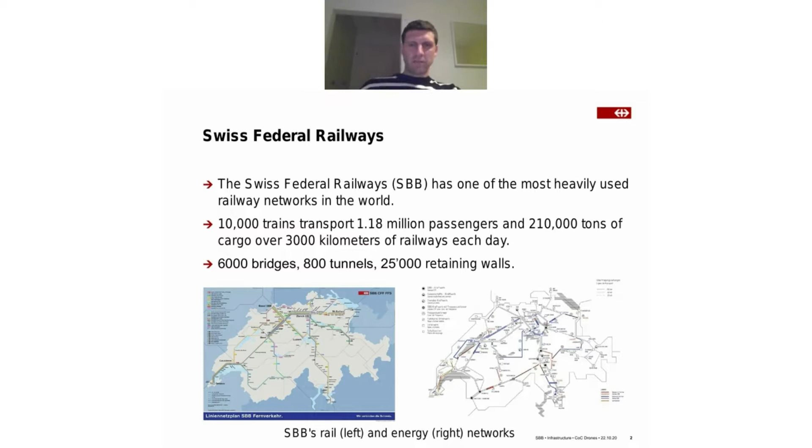We are 4 people working at the Center of Competence Drones, with 1 data scientist and 2 project managers, engineers. Our main task is to help our different departments and colleagues develop their use cases with drones and to define some standards, not only for regulations, but also for processing, analyzing, and so on. We are also connecting to different companies like Picterra that we saw before, and we have good contacts in Switzerland, but also all over the world.

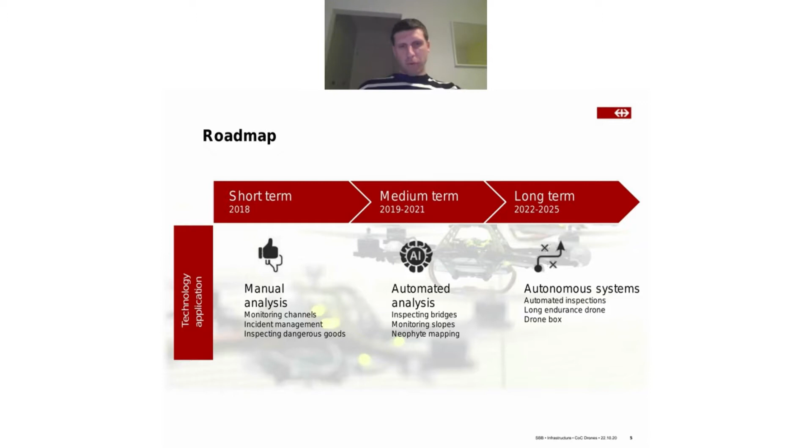So we started 2-3 years ago with some visual inspections using drones, but then we moved to automated analysis using AI, inspecting bridges or detecting plants. And the plan is that in the long term we move to autonomous systems, with autonomous drones, so that we can press the button, the drones capture data, and we can move forward with further analysis and analytics.

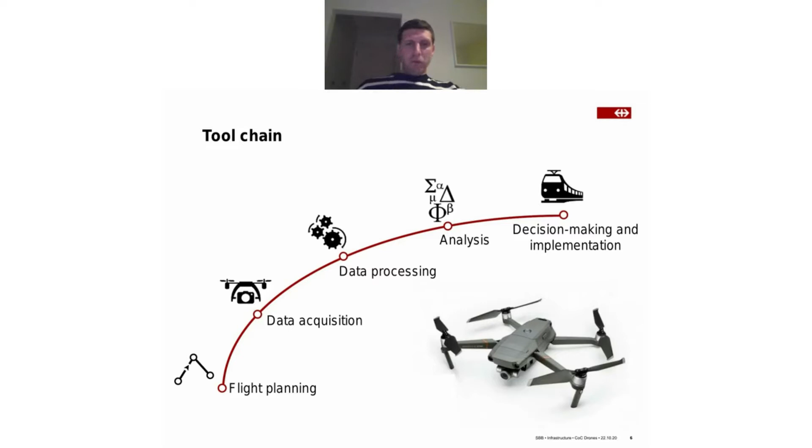And we have a long list of applications. I will not go through all this list, but it's just to show that we have some ideas that we bring to a proof of concept. And once we did the proof of concept and it's validated, we call it rollout ready, meaning that we can roll out these tests to the entire network of SBB.

When I made this list, I wanted to highlight which of these topics are using AI, but then I realized that almost all of them were using AI. So yes, we use AI on a lot of different topics, and I'll show some of them in this presentation. As for the technology, I spoke about drones, but we don't only use drones, we also use satellite imagery, and we combine them with terrestrial systems, so cameras and also LiDAR and so on.

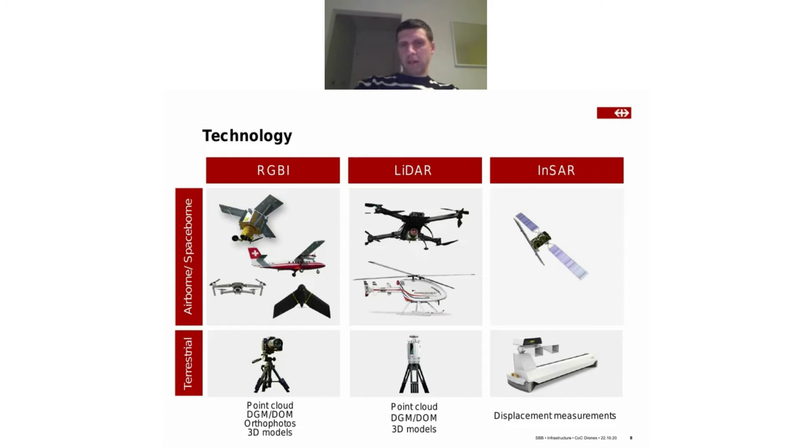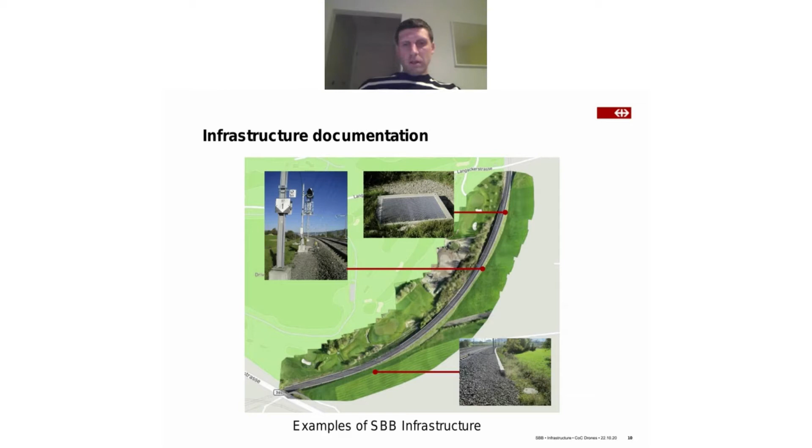So let's move now to the second part, showing some of these application examples based on AI. The first one I would like to show you is infrastructure documentation. All our infrastructure is measured regularly and documented in a database. We have different objects: signals, canals, manholes, and so on. I would like to show the first example precisely on the manholes. We wanted to automatically detect these manholes and update them in our database.

For this, we used orthophotos captured from drones, but also from helicopters, so that we get more data on the longer track. And we used the Picterra detection training that you saw before. We started doing some annotations on the platform and creating training areas. We already got very good results, with a precision of 96% and a recall of 80%. But we had quite a lot of false negatives that we wanted to remove from these detections.

So first, we added some training time. This parameter was introduced before by Roger. Basically, it's adding some layers in the neural network, and then we also added some annotations. We did active learning, meaning we used the detector that we had and reused its detections as annotations, so that we could go a bit faster. Adding these annotations improved the recall quite well, so that we could remove most of these false negatives. And at the end, to have some reliability on the results, we added some accuracy areas to get more consistent values on the precision and recall.

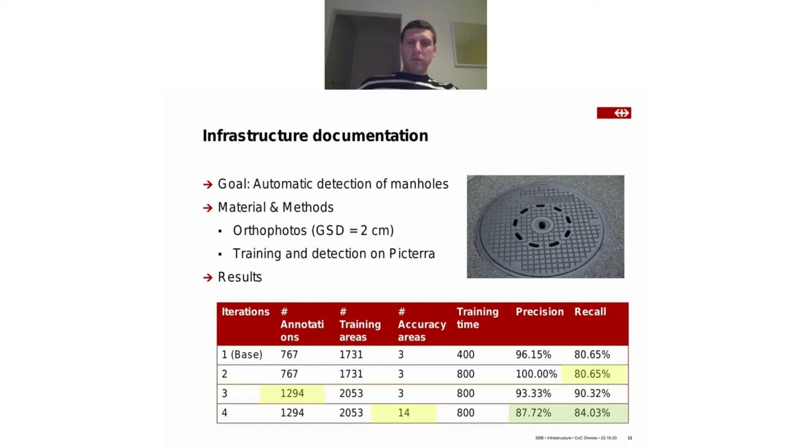And actually we did a comparison at the end with our own database, and we found out that more than half of the manholes were actually not correctly detected. And what we found out is that most of these manholes were covered by roofs or covered by vegetation. So basically, it was not really related to the detector, but to the data itself.

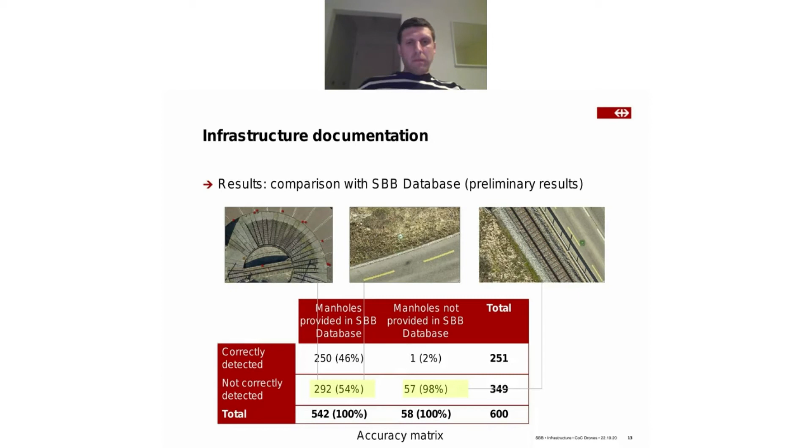And also, we actually had detections that were made outside of our parcel. So we detected some manholes that were actually not in the database. So this is why we also have some not correctly detected, but which actually were correctly detected. Then the next topic that I would like to show you here is the vegetation mapping.

So the idea is that we want to create some maps using drones and acquisitions from airborne systems. And we want to use these maps for treating, in an analogy to agriculture. We would like to treat this vegetation using hot water spraying vehicles. So we want to make a variable rate application, and we want to use as a basis these maps that we want to derive with machine learning.

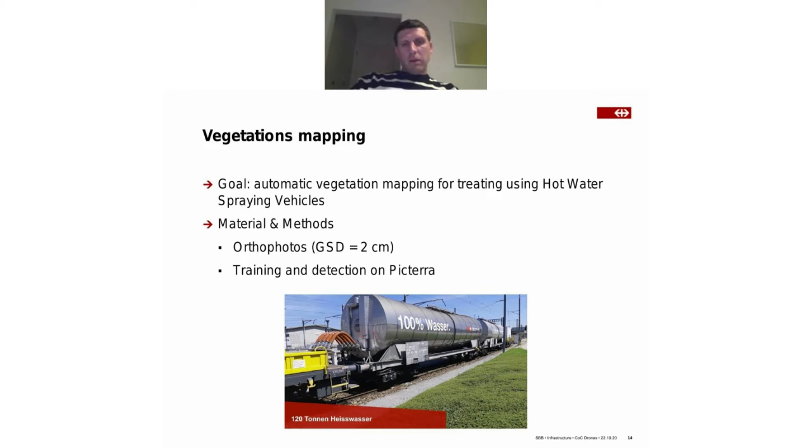So the data that we used here was again some orthophotos, and we used Picterra for the training and the detection. We created about 1,000 annotations and also 1,000 training areas. And we did some visual comparisons and observations that the first results were quite promising for us, so that we could use these data sets to spray where we effectively have vegetation.

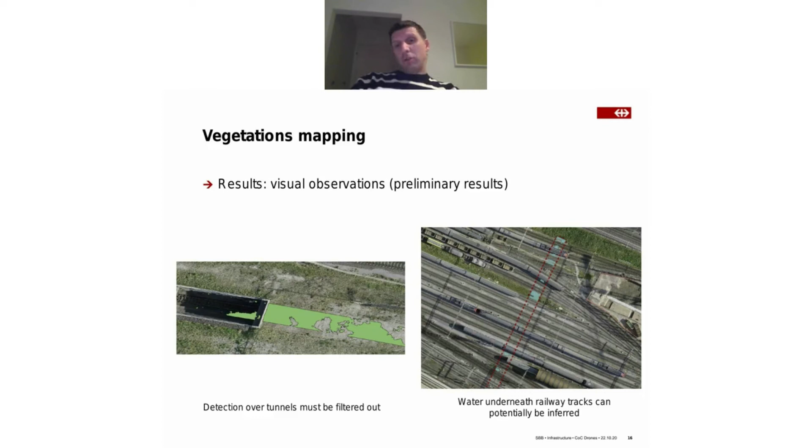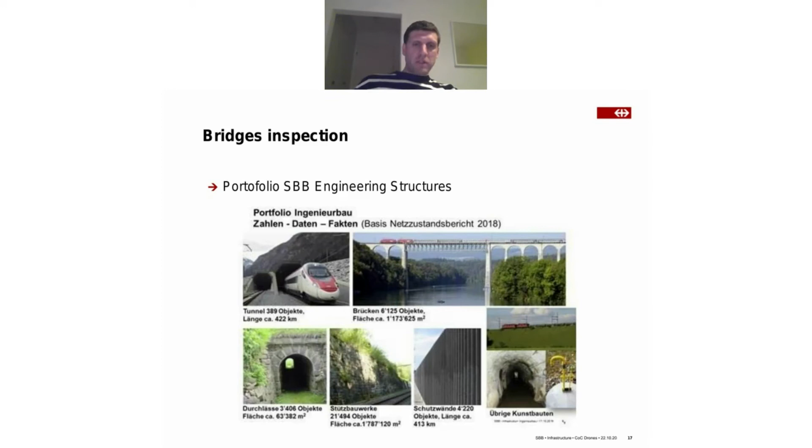The last topic that I would like to show you is about bridge inspections. We are talking here about bridges, but we have further engineering structures, so we have tunnels and bridges, and what I would like to show you here for the bridge inspection is the automatic damage detection on concrete bridges.

So we worked together with two different companies, CSEM in Switzerland and EasyInspect, a Danish company. CSEM used basically a Faster R-CNN model, which they trained and used for the detection of the damages. And in this case, we used an ortho-facade. So we generated an ortho-facade of the bridge, and that we used as an input. And EasyInspect used single images.

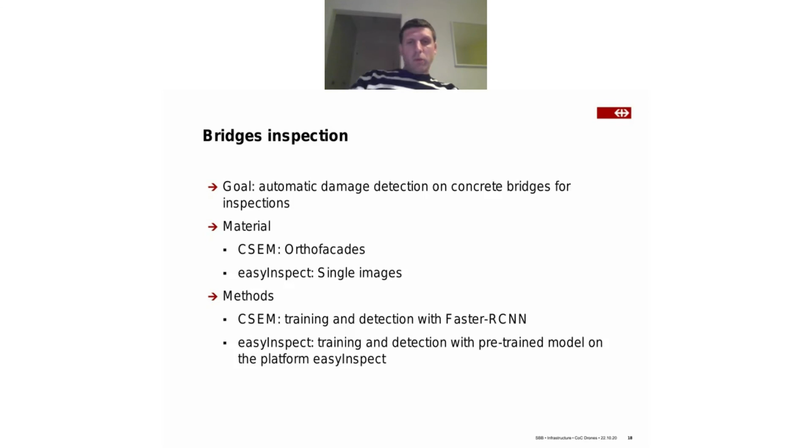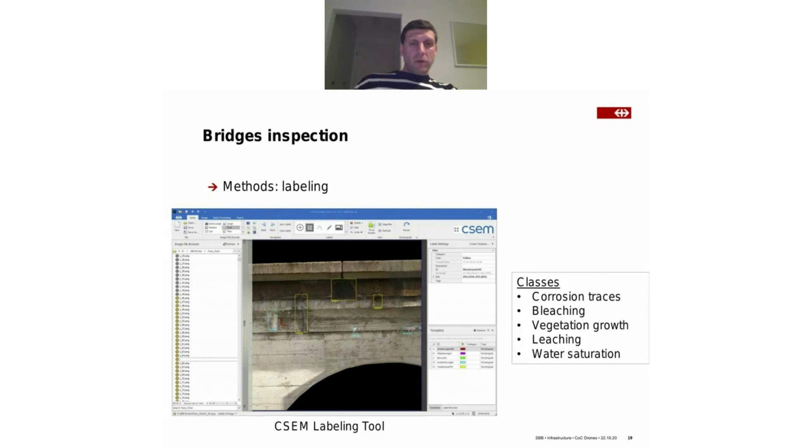So I'll show you here a bit of the results. First of all, about the labeling: we used the CSEM labeling toolbox, and we created different classes: corrosion traces, bleaching, vegetation growth, and leaching and water saturation. And the detection worked actually pretty well, so we were quite happy with it. We still had a lot of false positives, but as a first result, it showed that using AI for detecting damages on such infrastructures is promising.

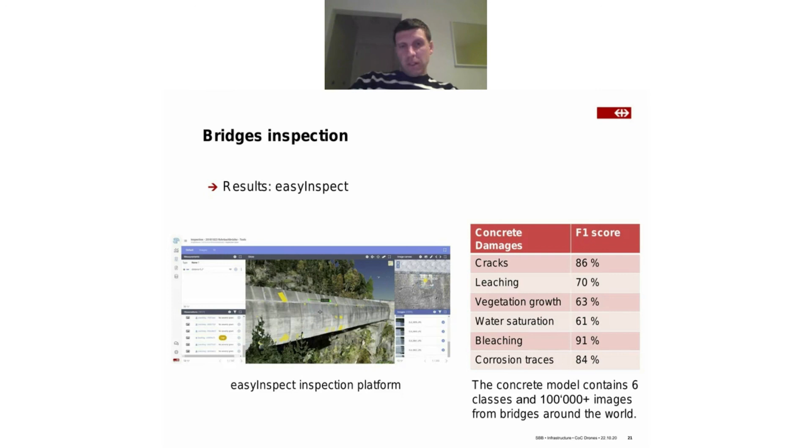For EasyInspect, we mainly used the platform for visualization and for consolidating the data set with the 3D model and the detected images. We used the AI from EasyInspect directly, and for the different classes we have pretty good F1 scores, especially for cracks and bleaching. We were quite happy with these detections, and we did some visual comparisons. So these were our results.